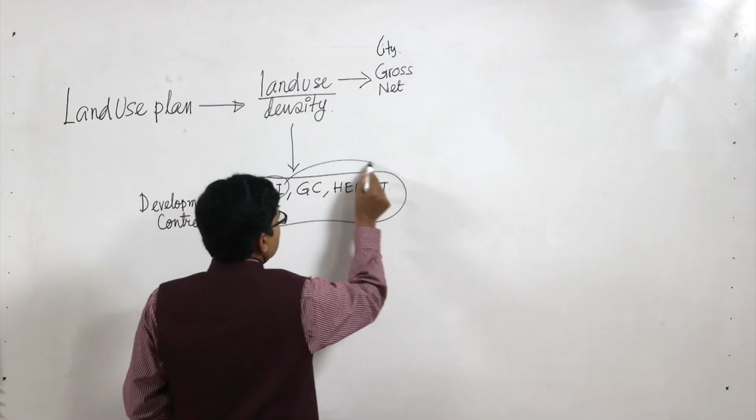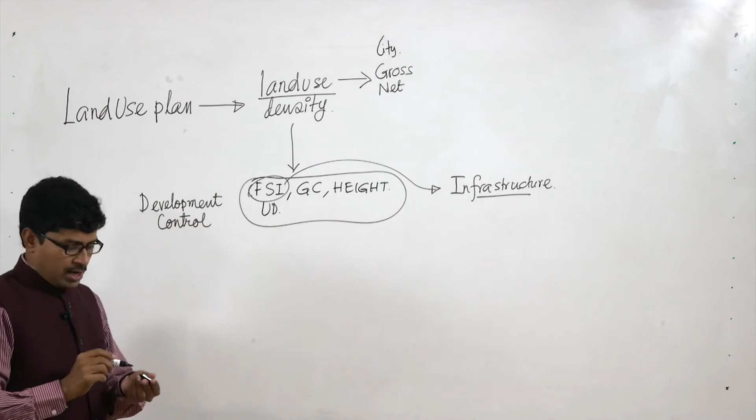We also discussed that the FSI is the buildability of the plot, and the factor which determines FSI is basically the infrastructure, which qualifies a raw land or agricultural land as buildable land or developed land for housing development. So, to go for the further strategic element of housing development in a city, let us discuss the infrastructure element of the

planning. Now, we also discussed last day how FSI, ground coverage, height and urban design elements are related. We saw in the overview that these elements are required to define the outer envelope of the building, so that it looks good, so that it becomes durable, long lasting, homogeneous and harmonious to the overall context. That is the objective of the discussion.

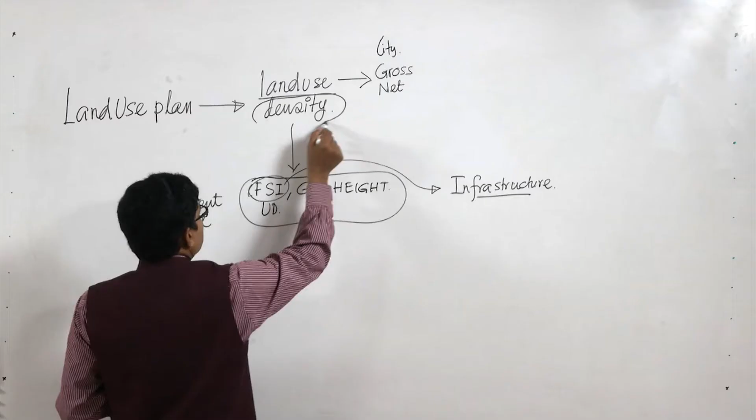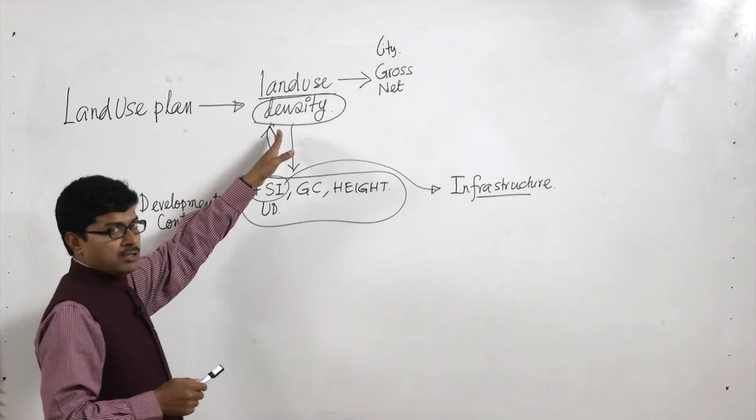Another point we discussed is that FSI and density are directly proportional, but we maintain the FSI with a variable density by creating different types of housing units for different economic groups, for example higher income group, lower income group or economically weaker section. So, to determine the maximum FSI or maximum density, infrastructure is a very important input, because the more compact, the more people living in the same area, the more the requirement of infrastructure. So, it is very important to understand the types of infrastructure and services and how they play in a given area.

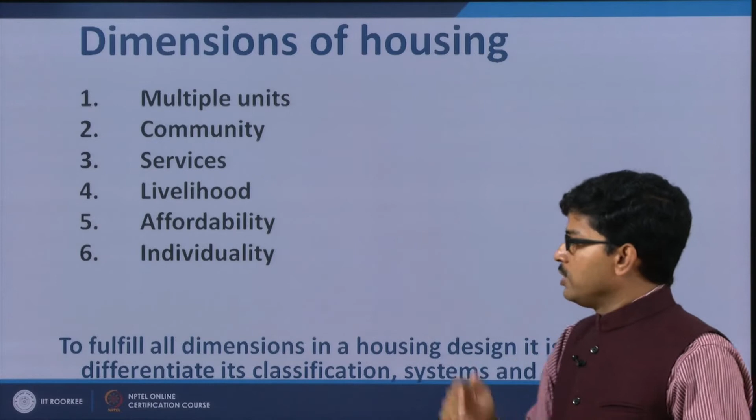So, the objective of housing infrastructure is to create the basic infrastructure, so that we can provide facilities and amenities and deliver accountable service. So, what is the meaning of these terms? Now, let us see. When we discussed various dimensions of housing, we saw that it is multiple units, there should be a community, and there should be some essential services including livelihood, which should be affordable, and individual attention should be there. So, service is a very important part of any housing development. We are not going into much detail, though we discussed this.

So, what is infrastructure? Why is infrastructure important in overall planning and development? What are the expectations from the planner in infrastructure planning, what are the key competencies required for a planner to deal with infrastructure, and who are the other contributors in infrastructure planning?

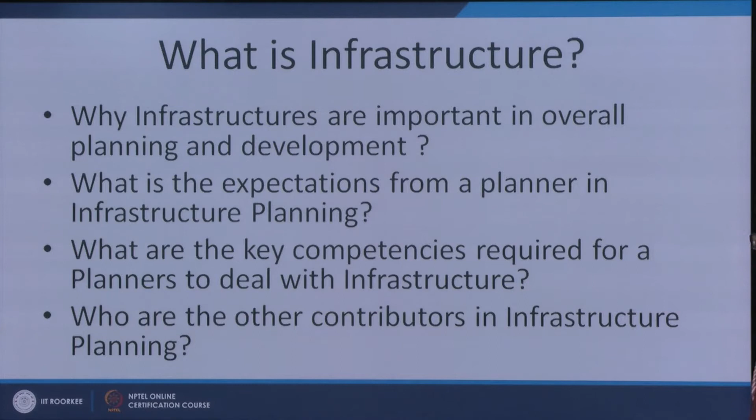So, infrastructure itself is a separate, very important subject where engineers, planners and architects work in this field, but as a housing planner, as a policy planner also, you should have some basic element of knowledge of infrastructure planning as well.

So, infrastructure basically is required to provide some basic services which we need for day to day living, like to perform daily basic human physiological needs like cooking food, disposing garbage, taking drinking water, having sanitation, services like that, and to have the basic elements to perform living activity, shopping, health facilities, to have safety and security, CCTV system, security systems, mixed land use, barrier free design.

These are some features to ensure safety and security, to have the space for social needs, for playing, friends, parks, community space and rooms. And also to have physical comforts and easiness for self and the family, like home delivery, doctor on call, intercom facility, generator backup.

So, these are the services which are required for daily living, but where will the services come from? Services basically come when some basic investment in infrastructure is there. For example, for drinking water, unless you have a robust system of water treatment plant, collection facility, distribution facility and recovery facility, you do not have the water system.

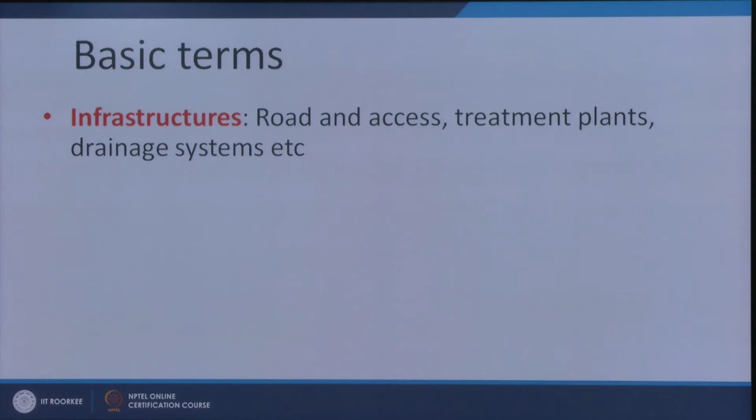So, now let us discuss the basic terms. Infrastructure is the physical element of any services, like road and access, treatment plants, drainage system etc., which is physical, you can see, touch and feel, and which delivers basic amenities and services. Services are what you enjoy on a day to day basis, like water supply, electric supply, garbage disposal, cleaning of drains; all these services come from the infrastructure.

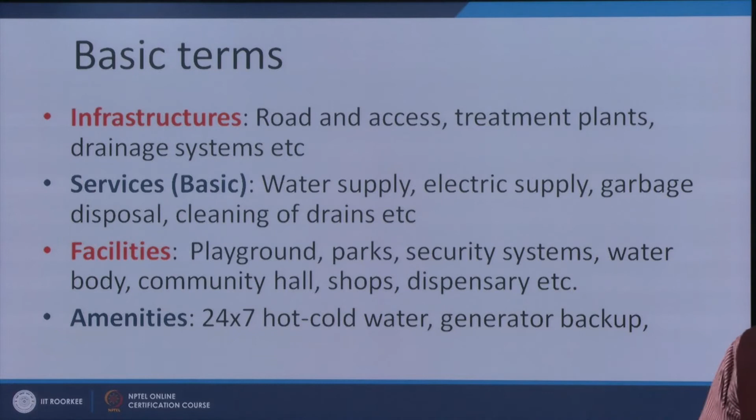Then facilities: apart from infrastructure and services, there are facilities like playgrounds, parks, security systems, water bodies, community halls etc. Facilities are also required to improve your quality of life, the quality of living. And there are amenities, which are by and large limited to inside your apartment, your living unit. There can be various types of amenities including hot and cold water supply, generator backup, home delivery, doctor on call. So, many amenities could be provided by a housing project.

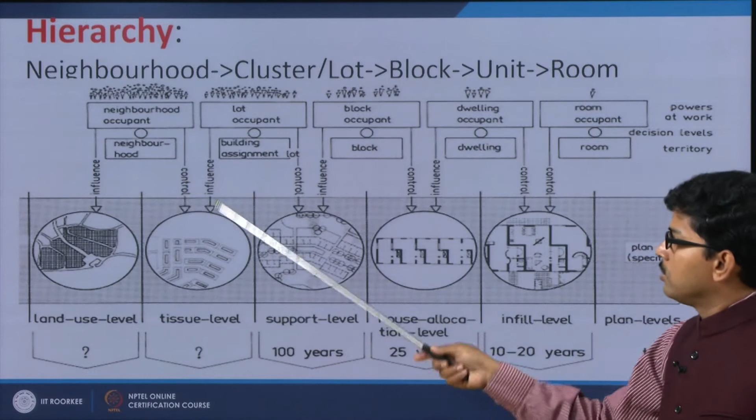So, we provide infrastructure and facilities at various levels of development, starting from the city to the local or unit level. For example, this is the land use level. At the city level we provide facilities. Then at the building or block level we can provide some facilities. Here the population will be more, and it can be distributed over a few blocks like this. Here the population will be less, and then the dwelling unit level and the individual room level.

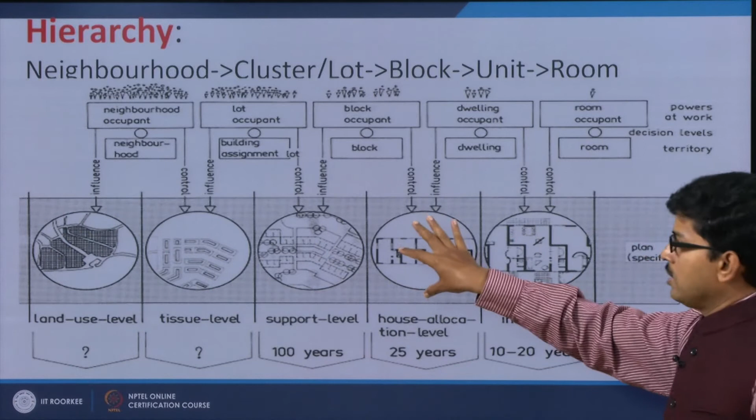So, try to understand that infrastructure at the city level and at the room or building level is different. Let us take an example. At the city level, a large stadium, large playground or large library can be a good facility, whereas at the building level a security block or water supply system, and at the room level 24/7 water supply, hot and cold water and room heating and cooling could be good facilities. So, based on the hierarchy and level of development from the city to the unit or room level, the level and size of these facilities differ, and we plan accordingly.

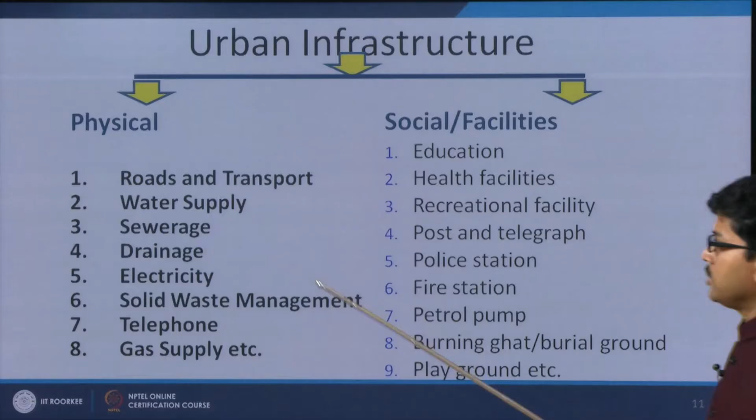So, we divide infrastructure into two major parts. One is physical infrastructure, whose manifestation is primarily physical, which you can see and touch: road transport, water supply, sewerage, drainage, electricity, waste management, telephone, gas supply. And social infrastructure, which we also call facilities, like education facilities, school, college, etc., health facilities, recreational facilities, post and telegraph, police station, fire station, petrol pump, the burning ghat, the playground.

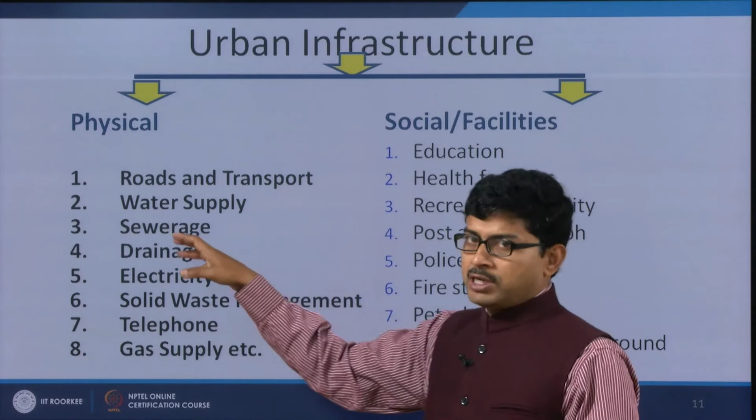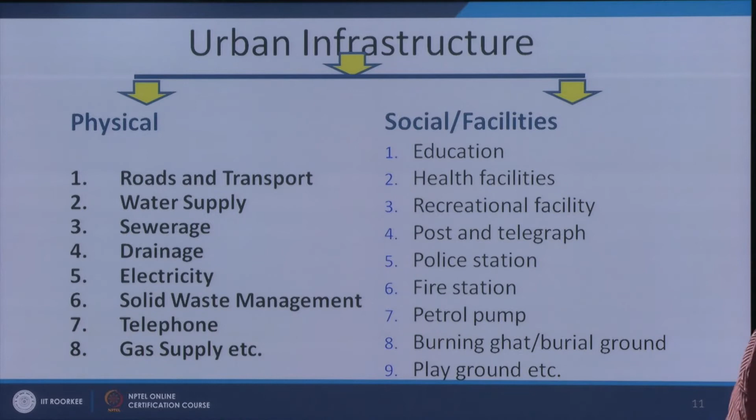Now, please try to understand that the physical infrastructure does not mean that it is 100% physical. Every element has some of the social component. Similarly, the social infrastructure also has some amount of physical component. For example, to establish a school, you need a physical space, a physical building, a physical land. Though its effect and outcome is social, it improves the social quality of a community. That is why it is considered as a social infrastructure or facility.

Now, having said that, we will discuss a little more detail about the roads, this transportation system, because for any township system, in any city, the circulation network is very important to develop that area as housing or as an integrated township. Now, there are various kinds of transportation system. It can be by air, from city to city or country to country. It can be through water, from one point to another through an inland water system, or there can be a surface system using road and public transportation.

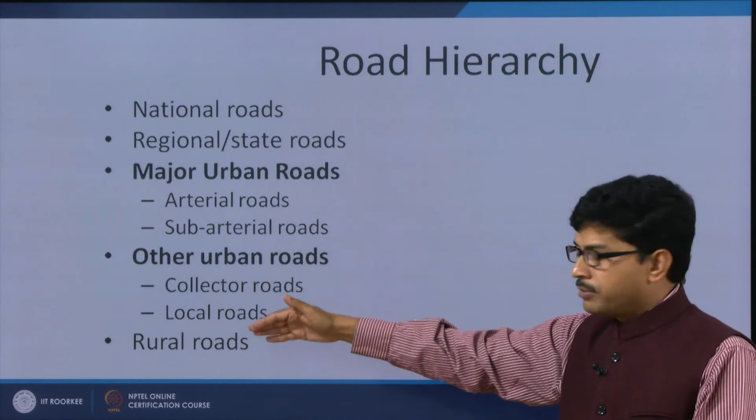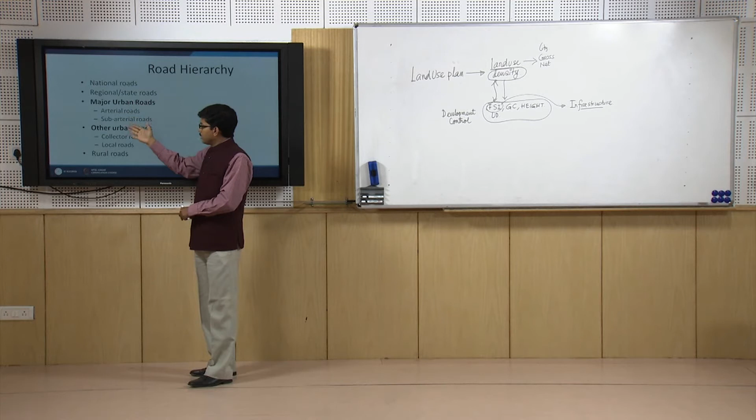Under the road we have different kinds of road: the national highway, the regional or state highway, and also urban roads like arterial road, sub-arterial road, collector road and local road. Other than this we can have rural road, which is very narrow, and the specification of the roads will be different. Our main focus will be to discuss the dynamics of the major urban road and the other smaller level urban roads, and how they relate with the overall housing development.

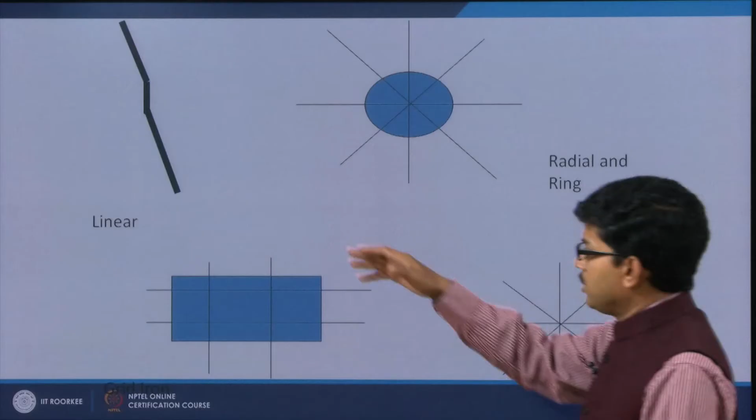So, there are a few elements which we should understand: the carriageway, median, divider, footpath, cycle tracks, service road and intersection, because after these few lectures on planning, in the end part we have a few lectures on the planning of individual projects, where we will deal with some of the elements of these road sections. These are the patterns of the roads: linear, gridiron, radial and ring, or radial. Before I go to a comparative statement, let me tell you how the different kinds of roads look, and how all the elements are placed to design a road.

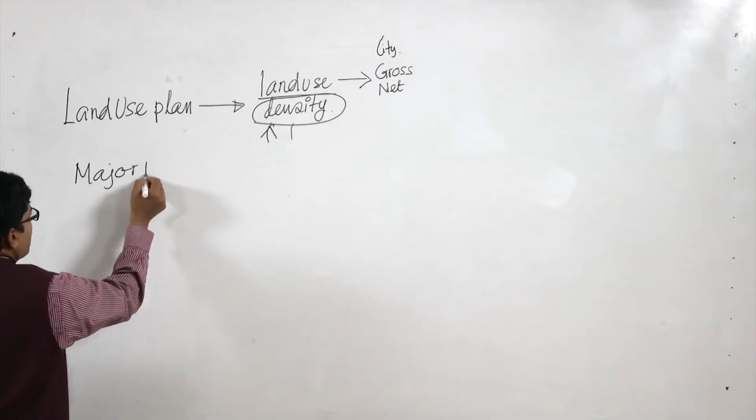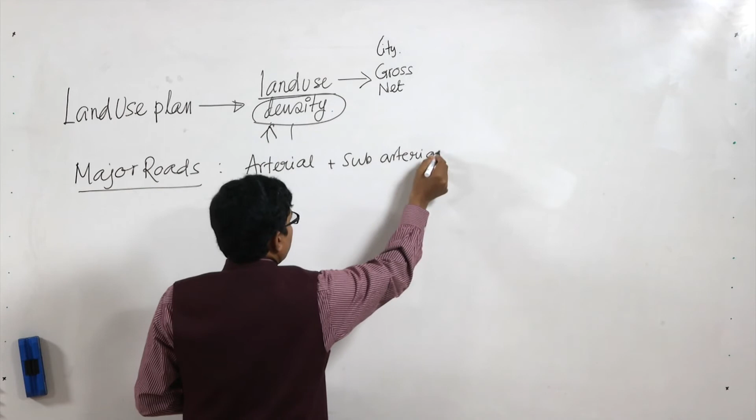So, the major roads we discussed are basically arterial and subarterial. The meaning of arterial comes from the artery, whose objective in our body is to circulate the blood from one part to another. Similarly, in a city, the arterial and subarterial roads help people move from one zone to another zone. Its objective is not to help you access your house; it is to take you from one zone to another zone of a city. So, let us see how an arterial road looks.

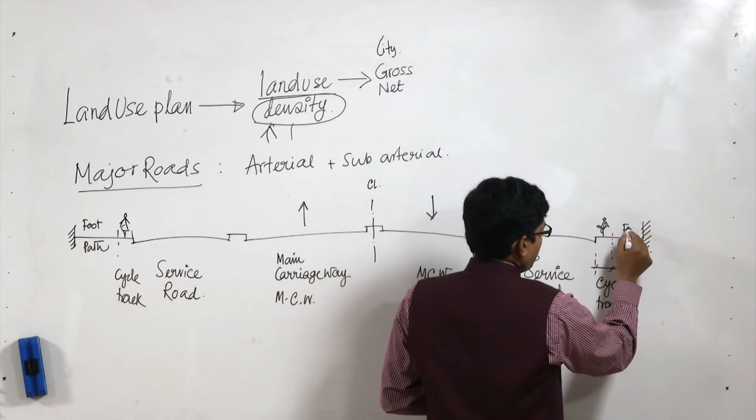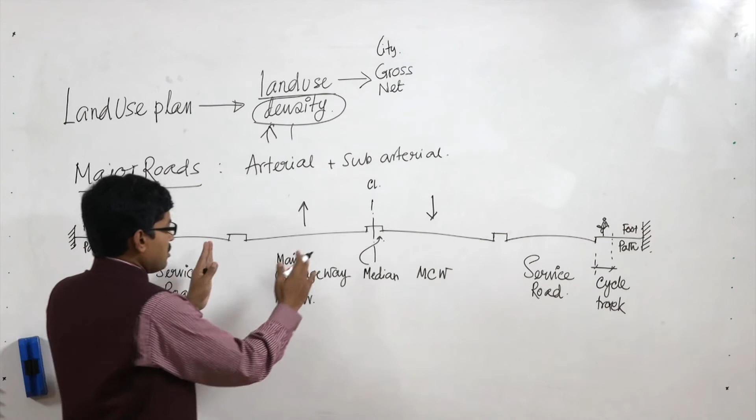So you can see that this area is kept for cycle track. This is footpath, and this is also footpath. And this is the median. This is the center line and median of the whole road section, and this is the main carriageway where the high speed vehicles like public transportation, buses and all those will go. Basically we keep 11 to 14 meters minimum, so that at least 3 to 4 cars can go side by side. This is 3 lane to 4 lane.

And here we keep minimum 7.5 meters, so that at least 2 cars can pass side by side like this. The remaining we provide based on space availability, but for the cycle track 1.5 to 2.5 meters is the space required. So this is a typical section of an arterial road. The total width of the arterial road, or right of way, in short ROW, is 60 to 80 meters.

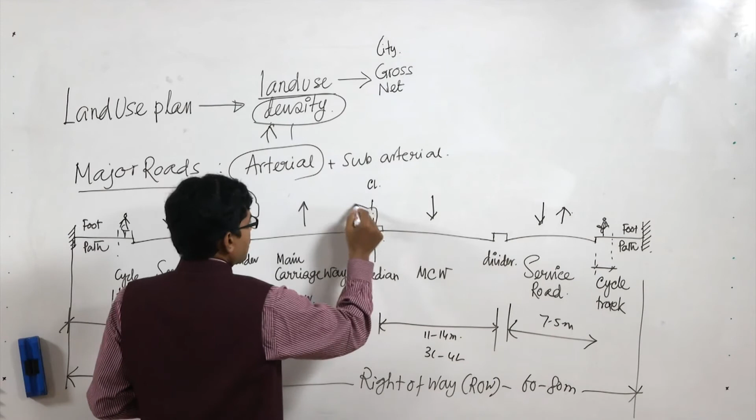So 60 to 80 meter right of way. Out of that, this is the median and this is called divider, which basically divides the main carriageway and the service road. Based on the requirement and the space availability, this divider and the median could be used for providing trees, for landscaping and for public convenience.

So this is a typical section of an arterial road. An arterial road is a major road giving access from one sector to another sector. I will show some examples, definitely 60 to 80 meter wide. But if it is a subarterial road, it will be 40 to 60 meter.

The objective of the subarterial road will be more or less similar, but the difference is this subarterial road connects the collector road with the arterial road. Collector roads and local roads are the lower level roads which collect trips or vehicles from the local area, and after collecting local vehicles they feed into the subarterial road, which is then connected to the arterial road. I will show some pictures so you understand.

So whereas the arterial road is 60 to 80 meter and subarterial road is 40 to 60 meter, it could have a service road and sometimes it may not. Sometimes we provide the service road or separate service lanes using a movable divider.

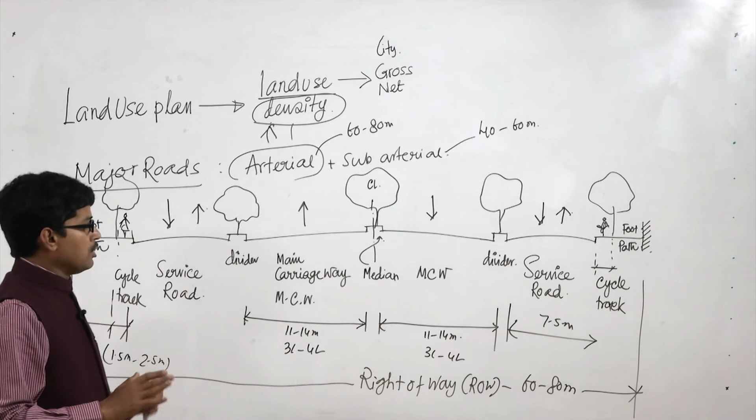We are not going into much detail of transportation planning or design, because our objective is to give an overall overview of each sector of infrastructure and services, so you understand it better for the next part of planning, when we go into housing planning. Next, let us see how the other minor roads look in urban or residential areas.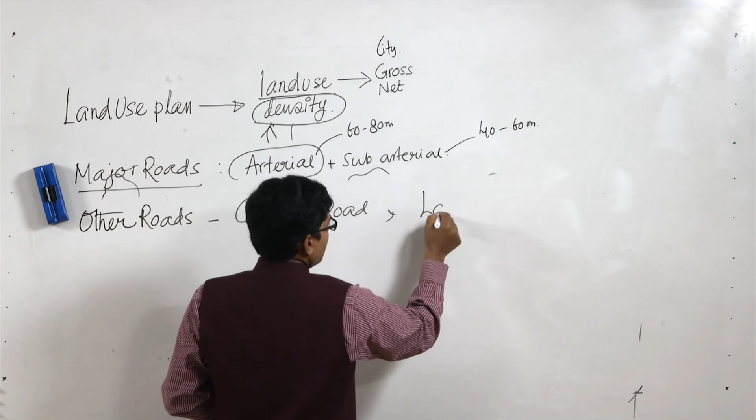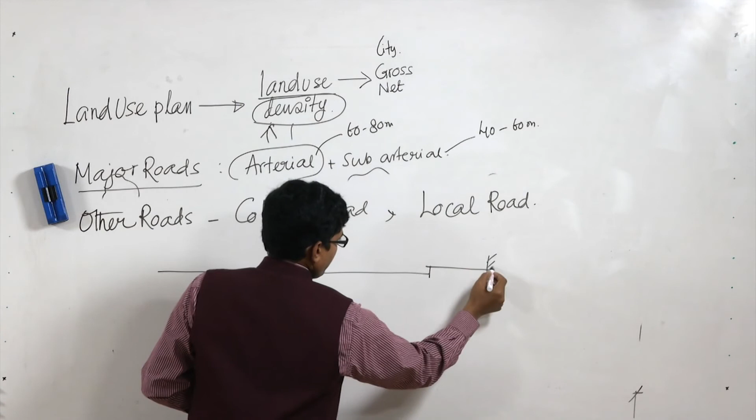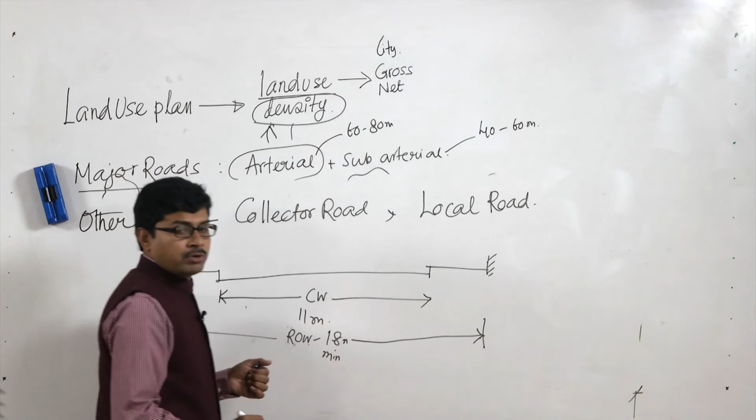So, collector road and local road. Let us draw it. For a collector road, the main carriageway will be minimum 11 meter, whereas the right of way will be minimum 18 meter, and it can go up to 24 or even 30 meter.

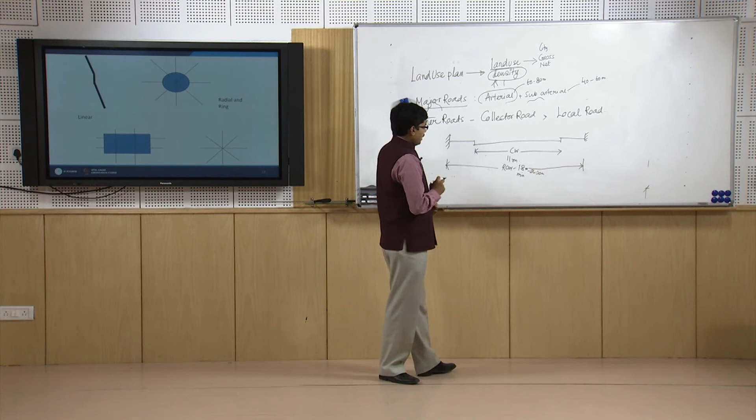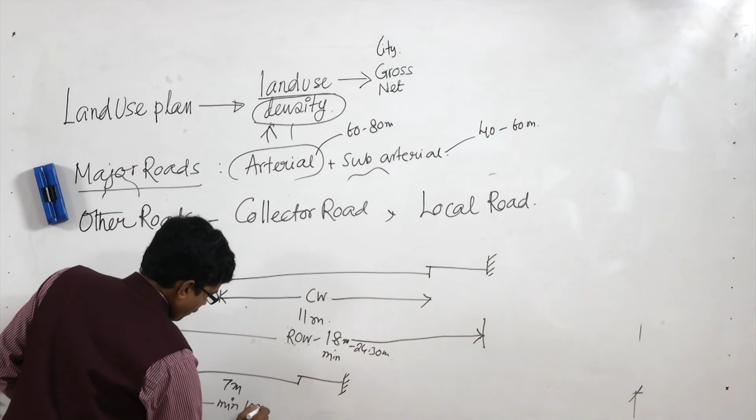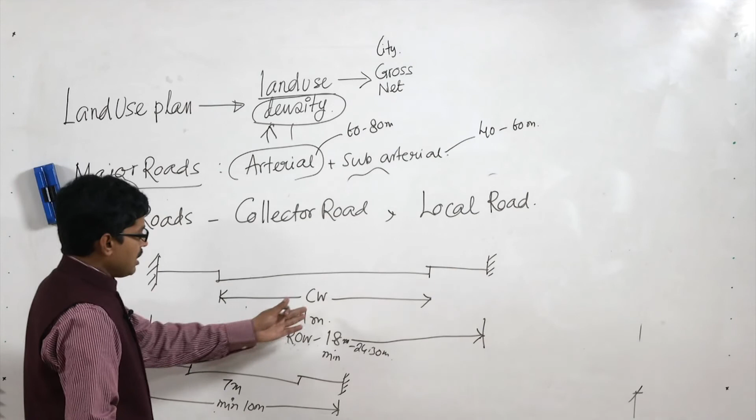Its main objective is to collect local traffic, local vehicles, and connect with the subarterial or in some cases the arterial road. The local road is basically 7 meter, so two cars can pass side by side, with a footpath. So the minimum right of way will be 10 meter, whereas for the collector road the minimum right of way will be 18 meter and can go up to 30 meter.

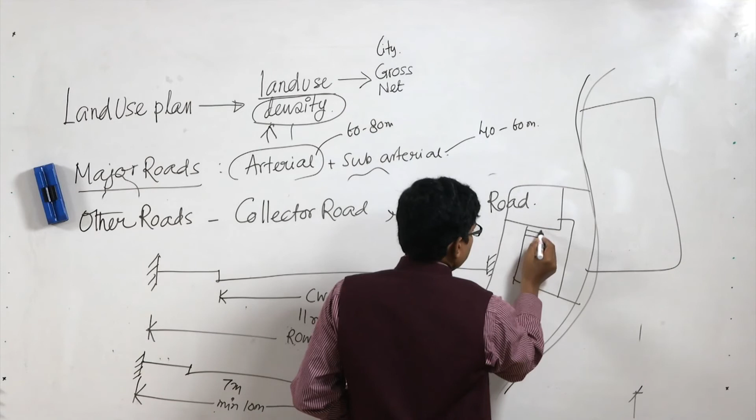So if this is the arterial road of a city, then the subarterial road could be planned like this, and the collector road will be the second level of connection, and the local road will be an even smaller road like this.

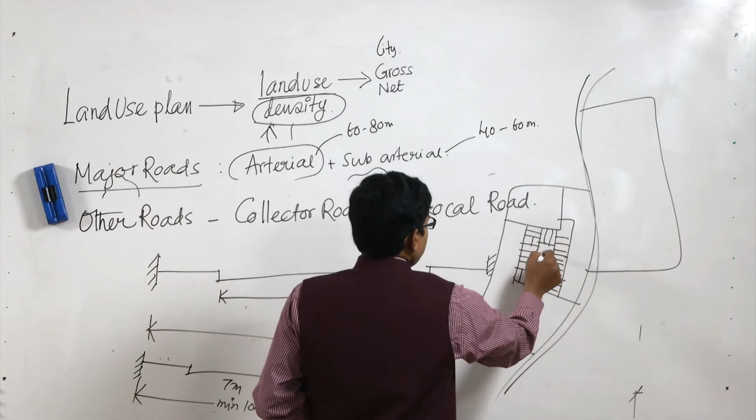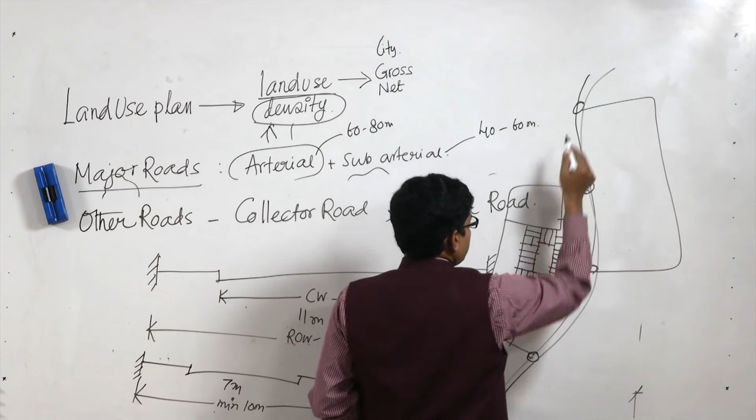This may be a typical example. You can see that the arterial road should have junctions not very frequent, very far apart, but local roads could have junctions very near each other, because the speed of vehicles on local roads is much lower than on arterial roads.

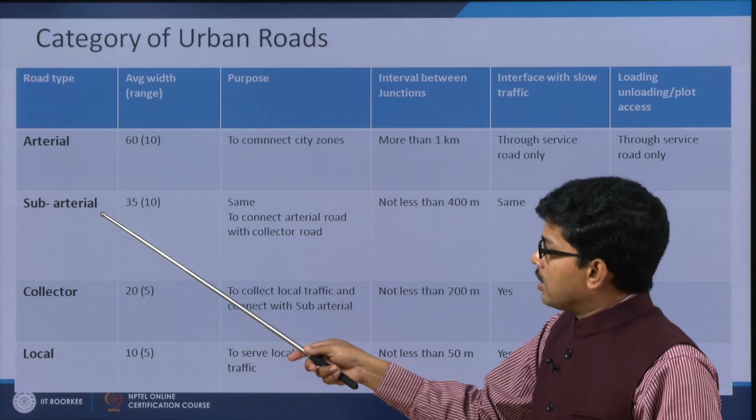Let us see a comparative chart to understand it better. The average width of the arterial road is 60 to 80, subarterial road 35 plus minus 10, collector road 20, local road 10. Its main purpose is to connect the city with the zones.

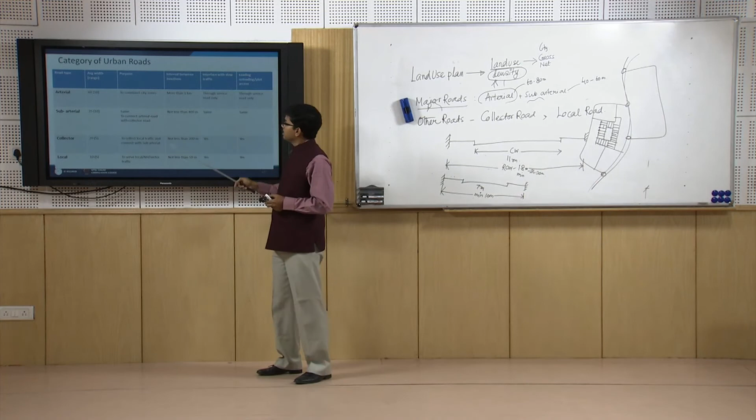The collector road's objective is to collect local traffic and connect to the subarterial road. Its objective is to give access to the plot, basically to serve local traffic. The interval between junctions for an arterial road will be more, like 1 kilometer; for subarterial not less than 400 meter; whereas local roads can have junctions about 50 meters apart, with frequent junctions and interface with slow traffic.

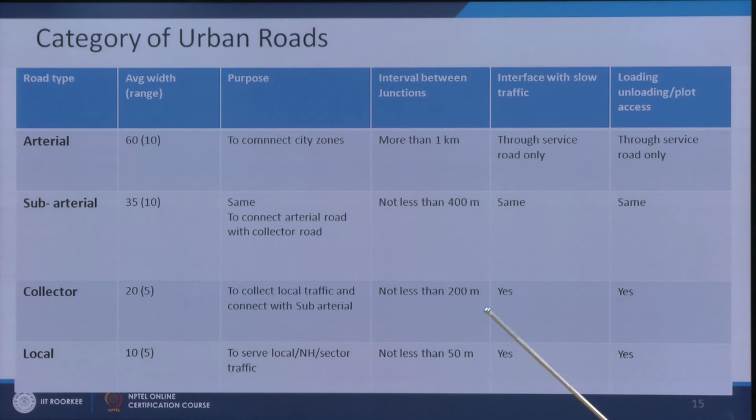The arterial road can meet with slow traffic only through the service road, whereas the collector road and local road do meet with slow traffic directly, because that is the objective of the collector road and the local road.

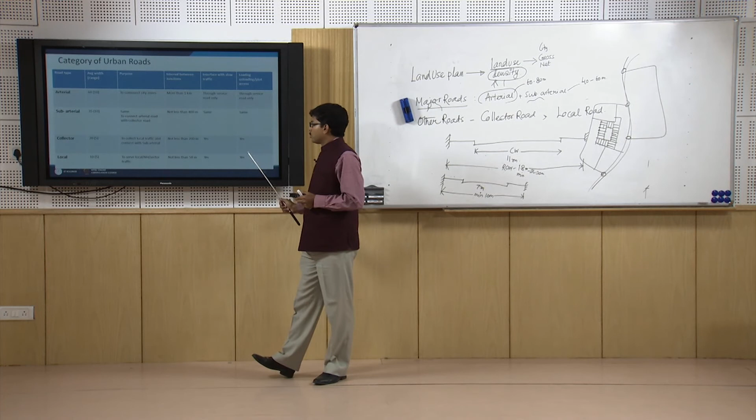Loading, unloading, or plot access—whether you can perform loading, unloading, stopover purposes like getting down from a bus and boarding a bus—those things are done only through the service road for arterial and subarterial roads, whereas collector and local roads can provide this loading, unloading, and drop-off facility directly.

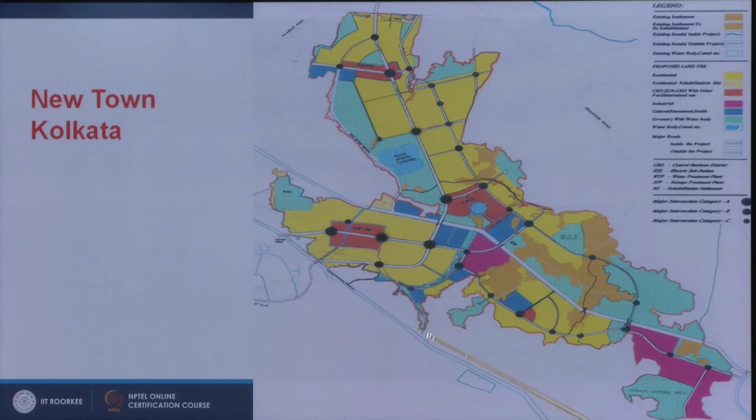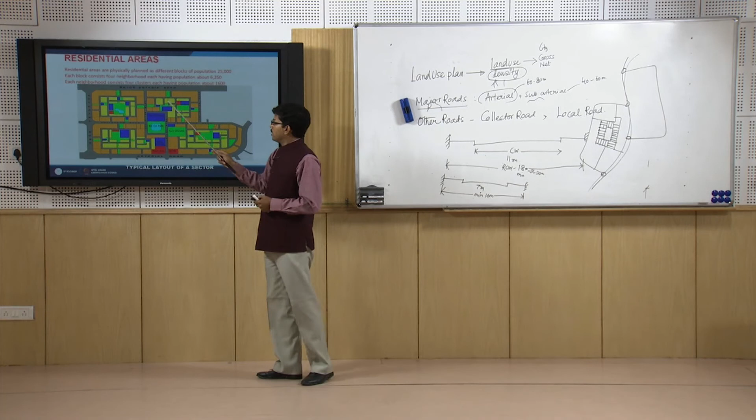The local roads and collector roads are not shown in the master land use plan, as I mentioned earlier. They are shown in the subdivision plan or plot layout plan, which will look like this. So in the subdivided area or plot layout plan, the local roads, plots, green areas and community facilities are shown in greater detail.

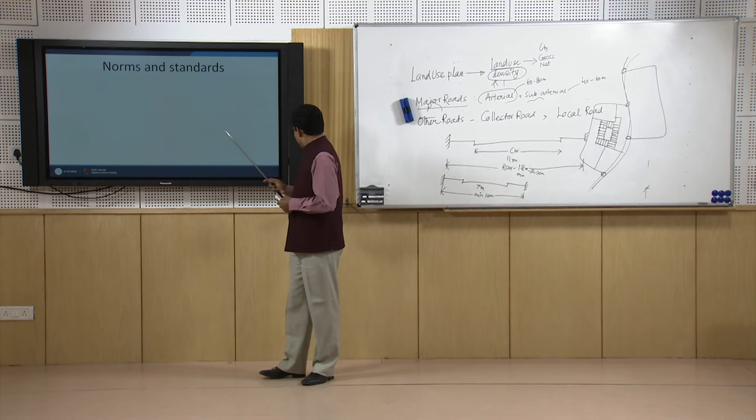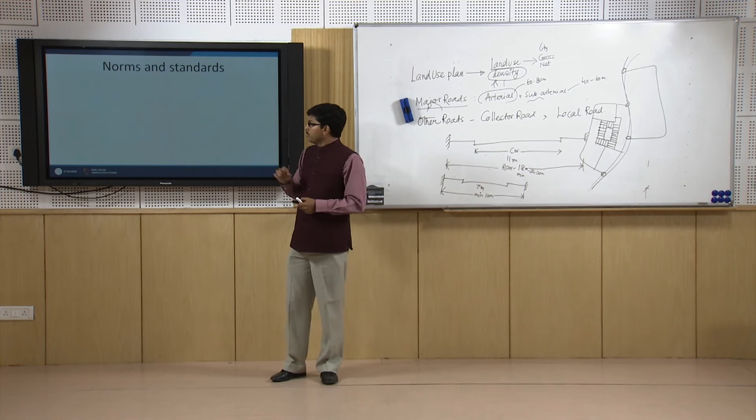To specify this, we have some norms and standards in terms of dimension and specification, but for any infrastructure planning or services, we have different kinds of norms and standards.

The most important norms and standards related to planning work is the URDPFI. The full form is Urban and Regional Development Plan Formulation and Implementation Guidelines. It is formulated by the Government of India, Ministry of Urban Development, and it gives the planning norms, methodology and process for every level: regional planning, city planning and local level planning.

The National Building Code of India gives the overall framework for designing any type of building and its services. The electrical code in India provides the basis and framework for designing electrical installations and electrical services in a city.

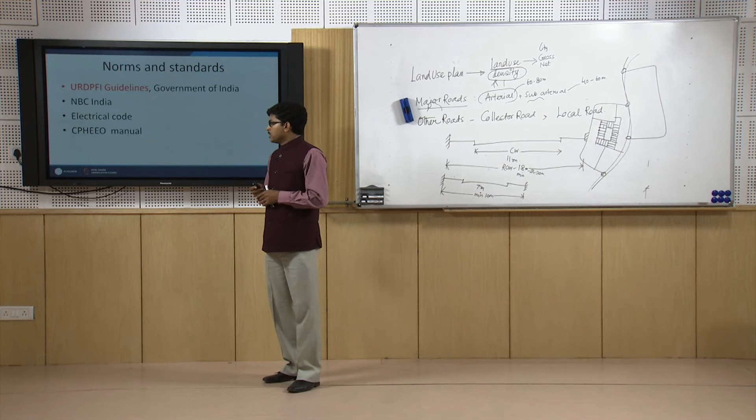The Central Public Health and Environmental Engineering Organization manual provides norms and standards related to sewerage, sanitation, water supply and public health matters. So for all sewerage, sanitation and public health matters, we definitely follow the CPHEEO manual.

So apart from URDPFI, NBC, electrical code and CPHEEO manual, we have local rules and regulations—like every municipal authority or municipal corporation can prepare their own rules and regulations, which will be followed as per requirement.

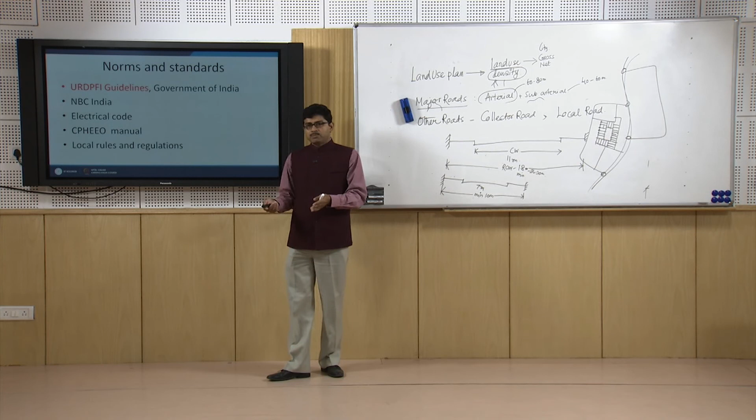For any city, we make the master plan and then the housing development. So for developing that particular housing project, we have to follow all the codes and also the local rules and regulations for designing the housing project.

Next lecture we will touch upon the overview of a few other infrastructures like drainage, sanitation, electricity and solid waste management, just to make you aware of how it works and the mechanism at the city or township level. After that we will also touch upon the elements of social infrastructure, services and facilities.

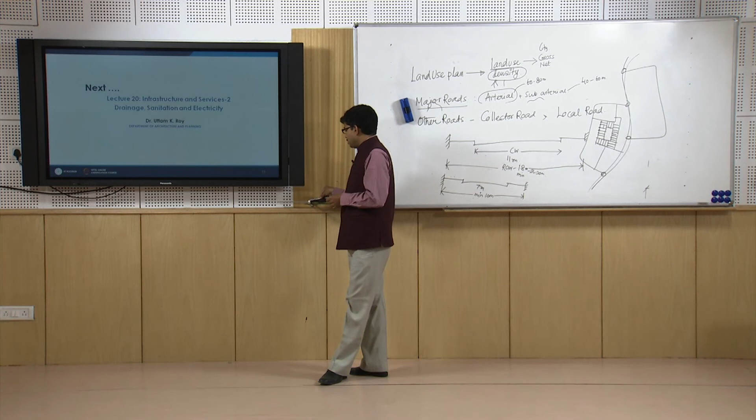Today we discussed the essence of infrastructure in the city. Infrastructure is divided into two parts: physical infrastructure and social infrastructure. Social infrastructures are sometimes called community facilities, and services are the intangible benefit we get from the infrastructure. The water treatment plant could be infrastructure needing capital investment, but the drinking water we get from it is a service—an intangible element.

Similarly, some amenities and services are required at the housing level or project level. Some amenities are determined or considered on site, inside the building or inside the room facility, and infrastructure, services, facilities and amenities are all planned as per the level.

Some services are required at your room level, some at the cluster level—meaning the block or building level—and some at the neighborhood or mohalla level, while some bigger services are required at the city level. That is the crux of the discussion, and based on the requirement or provision of the service, we can determine the livability of the city and proceed to project-to-project design of the housing project. So, thank you for today.